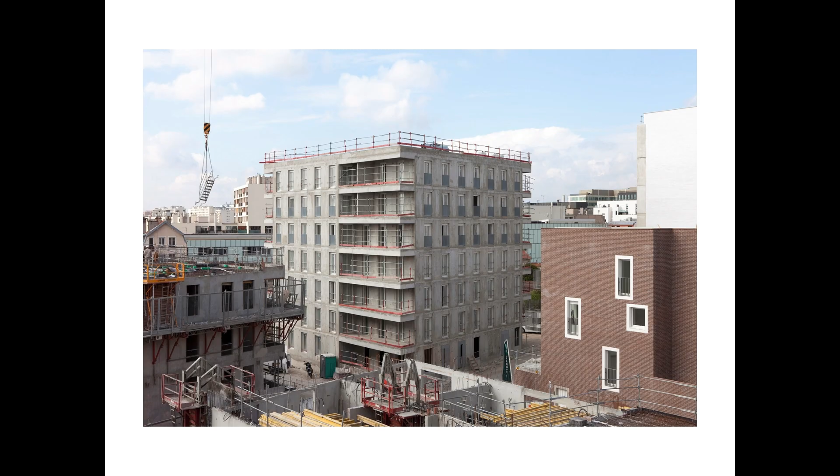This is the first building we did with the office—a competition, a commission we got in 2009, at a moment where sustainable architecture was kind of painting everything green. We did not feel very comfortable with this, and we wanted to provoke maybe the word, the context, the politics that were claiming to be sustainable while mainly doing buildings such as this one, all concrete.

So it was just a way for us to try to explain a little more what we did here. When we start talking about sustainable architecture, it was definitely not about painting a building green—we had to go deeper into architectural culture and the history of construction to really understand what sustainable architecture means.

This is a research project, so I'll start with the research, even if the building we built came before this exhibition. It was an exhibition hosted in Pavillon de l'Arsenal in 2018, and this exhibition addressed three major relations with construction.

The first was the territory, the resource itself—limestone, which I will talk about. The second was the ground, the relation with the ground: building is extraction, whatever you do—it's transforming the crust, the earth, into elements of architecture.

The third was this idea that when you find a natural object, architecture starts when the hand of men and women begins to appear on the natural fragment. That was more or less the way we wanted to start dealing with sustainable architecture through construction, through the ground, and with the notion of territory.

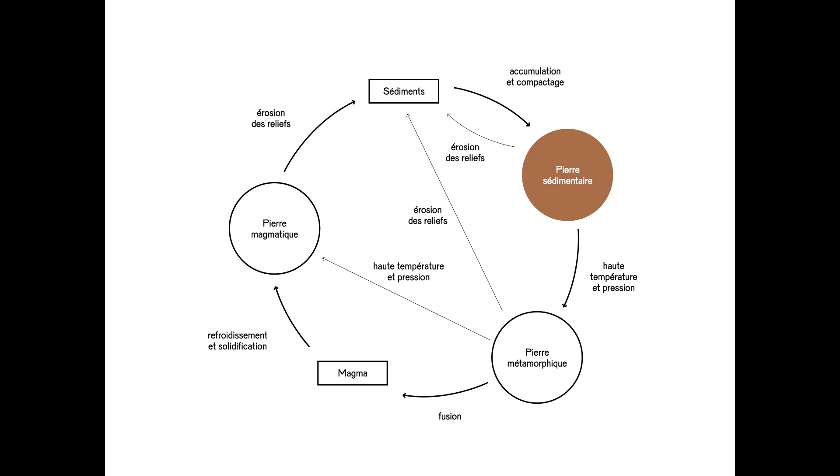What's interesting is the cycle of the process. Sediments become sedimentary rocks, and then with high levels of temperature and pressure, they become metamorphic stones. Then they get heated and become magmatic, then erosion, and sediments again, and sedimentary once more. It's very interesting to understand this is a very long cycle to get the sedimentary stone, which ages between 25 to more than 100 million years.

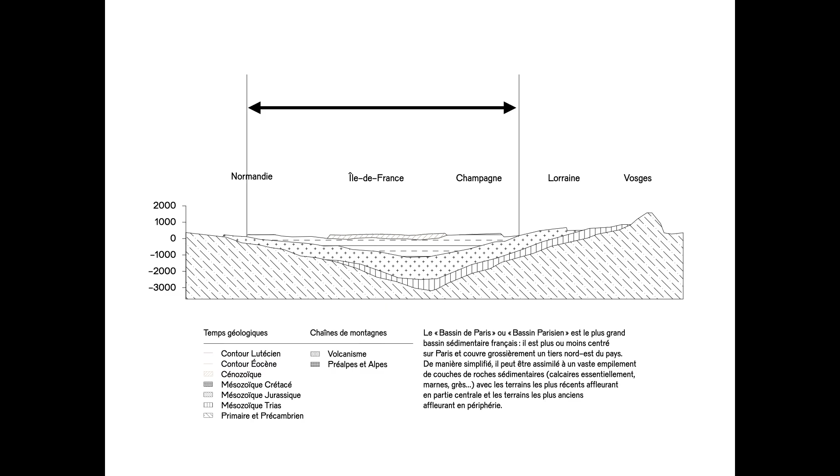So here you have Normandy, Île-de-France, Champagne, Lorraine, and then les Vosges. And this is the Parisian Basin, where you have all the sedimentation layers that have been layering on top of each other, creating this map.

What you see here in the lighter color is the Eocene era, and then you have the Lutetian, which is the most accessible layer of stone that you can get to build and extract construction stone from.

And then we selected 9 quarries that you can see here, 9 operational quarries. That was part of the exhibition to demonstrate the availability of the Parisian Basin to deliver a certain amount of stones to build and be part of the actual construction.

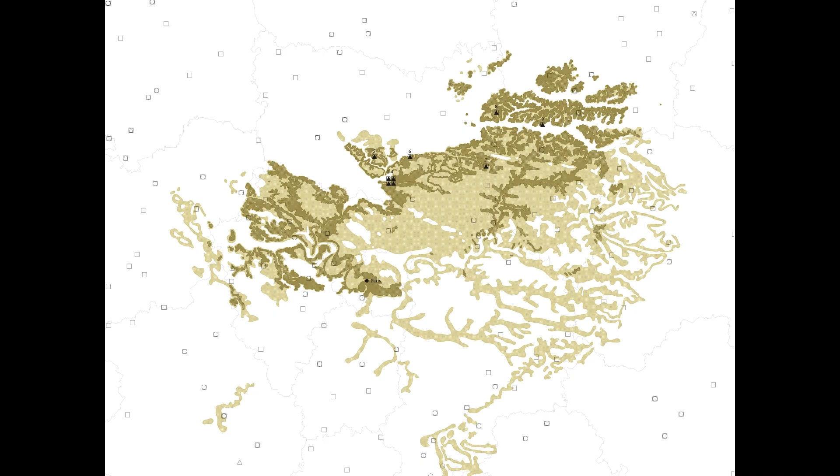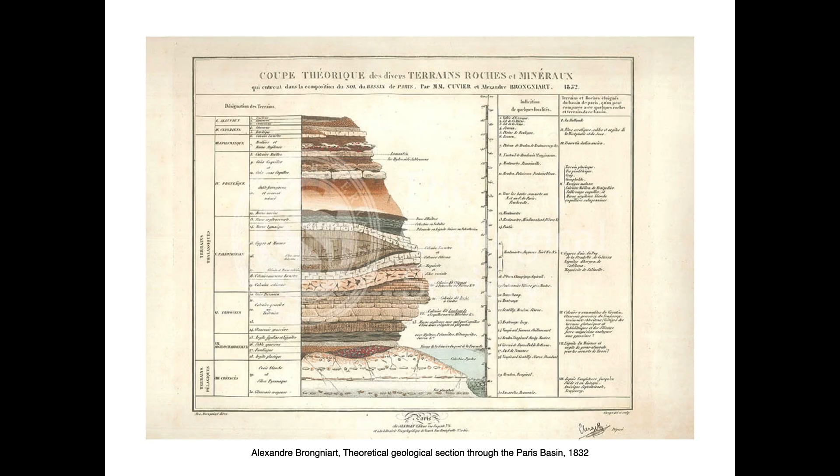So we were very interested in being scientific, very rational. We used old drawings from geologists, such as Brongniart, a very famous one. And then we started to describe each ground of each quarry and to be very precise about the types of stones included in each ground of each of these 9 quarries.

I won't go through all the quarries, but I will just show one. This is one quarry, for instance: Carrière de Saint-Maximin, which is a very famous quarry. The Pierre de Saint-Maximin stone is one of the most important stones from the Haussmann period in the 19th century.

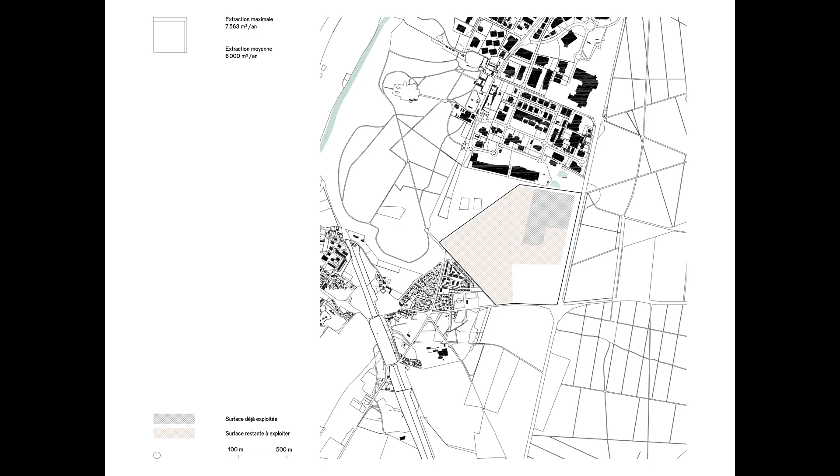Here in gray, you can see what has been extracted, and in brown, what could still be extracted. So for each quarry, we described the very precise amount of potential resource to continue building Paris and the rest of the territory with these natural stones, with natural material.

For each case, we described different layers. The first layer is what we call the découvert, which is the earth you have on top of the first layers of stone. Then you have different kinds of stone: roche franche, roche ferme fine, roche demi fine, etc., which are the different types of sedimentation layers. In each of these beds, you have different types of stone resistant to compression.

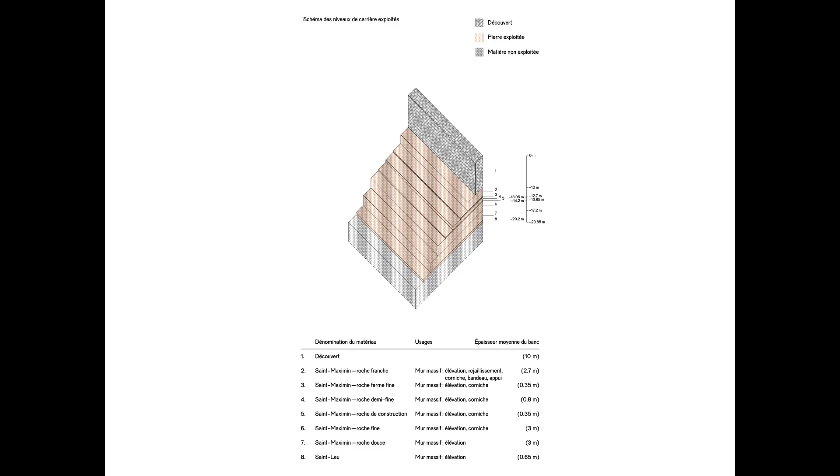You have a whole panoply of qualities of resistance to compression, of types of stone in each quarry. Another one, the biggest one around Paris, is Carrière de Noyon.

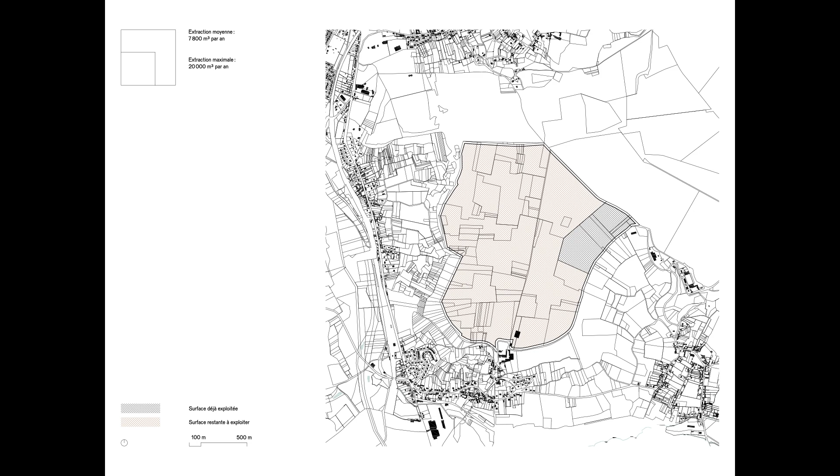This quarry is very big, so you can see again in gray. But if the first one was an uncovered quarry, this one is an underground quarry.

So here you can see the earth, and the way it is extracted: the stone is evacuated from this kind of tunnel that you can see. Here, a little less types of stone, but a very, very big quarry in front.

So we displayed all the types of stone, each as small blocks. They were all very specific, classified from here, the hardest one, to the softest one. So we have different types of resistance.

The first one can handle a type of resistance which is more or less even better than concrete, from like 75 to 80 megapascal. And this one over here is softer, between 6 to 7 megapascal. So different types, different colors, different shapes, different aspects, just to demonstrate the richness and elegance of the Parisian soil.

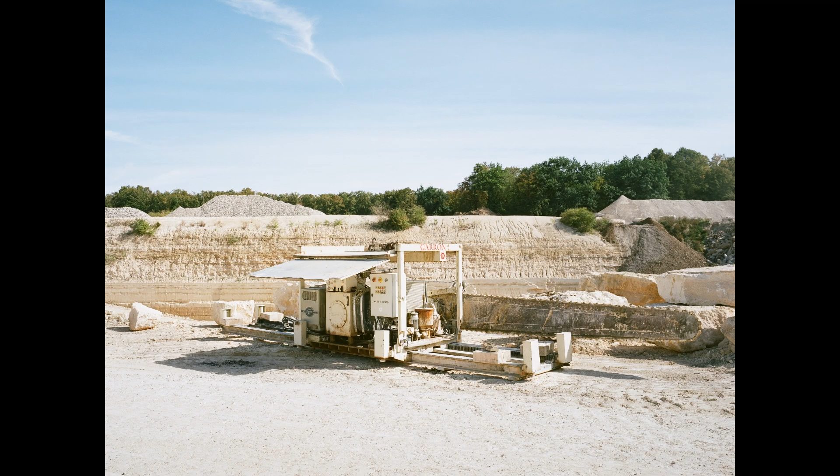And beyond this, we started—this was also happening at the end of the construction of our building, Oberkampf. So the conclusions we were trying to reach in this exhibition, the questions we were raising, were totally connected to the building we were doing.

First is this act of sawing, of cutting the ground with this one tool that has been used for years. The energy has changed, but it's the same principle—a very big knife, une tronçonneuse, which we call haveuse, naveuse. And when you extract, transform, and put stone into buildings, it's the exact same way.

We were very happy understanding this kind of immediacy in the way you deal with this natural element that becomes an architectural element. A natural piece of ground becomes a very sophisticated and cultural element of architecture.

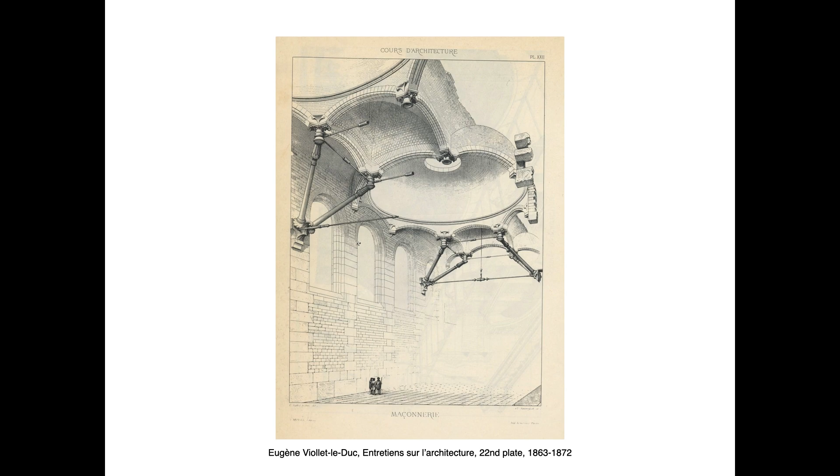Last, maybe a conclusion of this exhibition was our interest in hybrid architecture. There were debates we had with colleagues also interested in stone construction, saying that when you use stone, you should not use anything else but stone. We did not feel very comfortable with this, and we thought maybe one way to give power to the stone industry is to make it...

...negotiate with the other industry rather than saying, okay, I'm the best, I have the solution, and concrete is bad.

We were very interested in this kind of approach towards architecture and the mix of materials. This building was delivered about six months to a year before this exhibition.

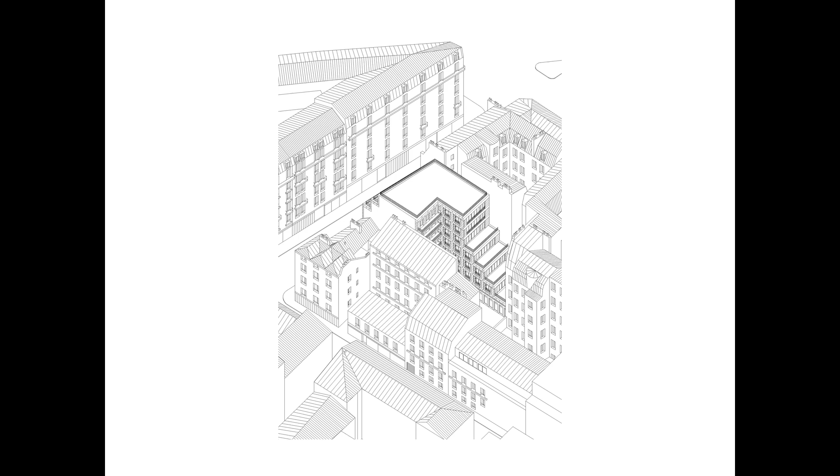Here you can see the response on the master plan. You can see the courtyard, which is a response to the existing courtyard at the center of the plot. You can guess the shapes of the windows, and here the adjunctions of buildings, concrete elements that we can talk about after.

The plan has three apartments per floor. One is traversant, a crossing apartment. Here you can see the setbacks—each time you have a setback, you lose one room to raise the top, and then there's a studio here. Also the structure was another way to consider this moment of the late 19th century, where housing in Haussmannian style also considered steel in construction.

You can recognize steel columns here in the middle of the plan, which organize and structure the layer of the plan. It orders the position of the shafts, the bathrooms, and everything here and there.

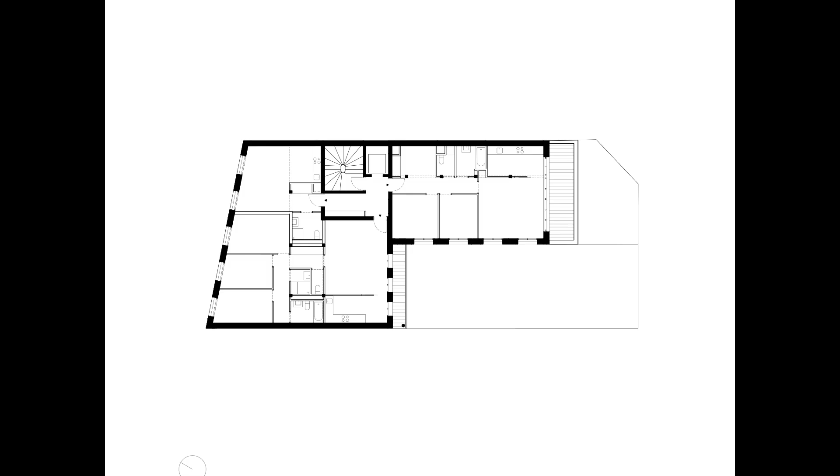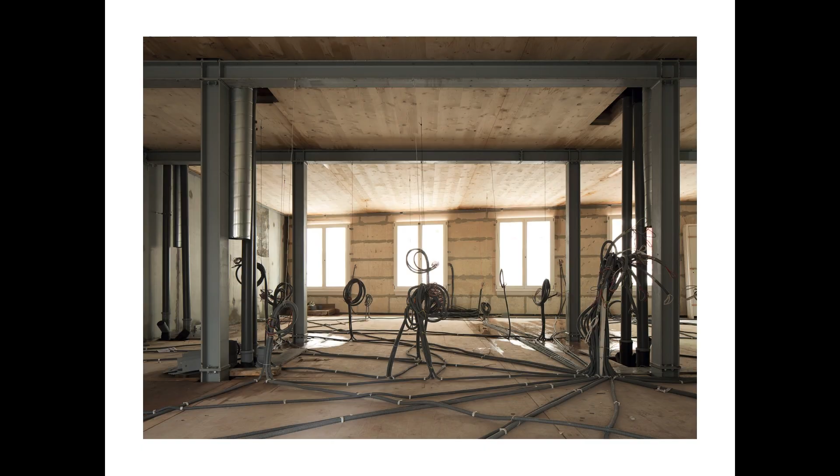That's a construction site picture: wooden floor, load-bearing stones, and steel structure.

It was very directly connected to Haussmannian architecture, trying to demonstrate that sustainable architecture can simply be connected to parts of history which were already dealing with the same topics, without knowing it of course. But that was the most interesting part to us.

And then you can see the wooden structure used because of the wood itself, but also because of the weight of this plinth, of these floors, which were very light. That lightness brings the possibility to use load-bearing stones.

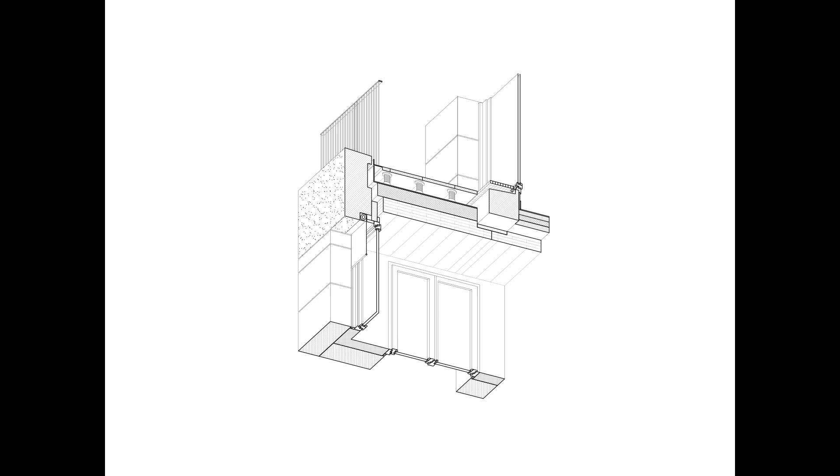Without really claiming it. So here you can see the setbacks again, and the window that we can talk about now. The window is an assemblage of single stones like this, and then there's this small shape we gave to the lintel. If I go back to the quarry, I'll talk about this lintel afterwards.

This is where the stones come from. It's a pity they don't come from around Paris, and this is why we made the exhibition—because the building was built before the exhibition, so at the end we realized we should have used Parisian stone to reduce the distance between the building and the resource. But it was our first building, and the next one hopefully will pursue this ambition.

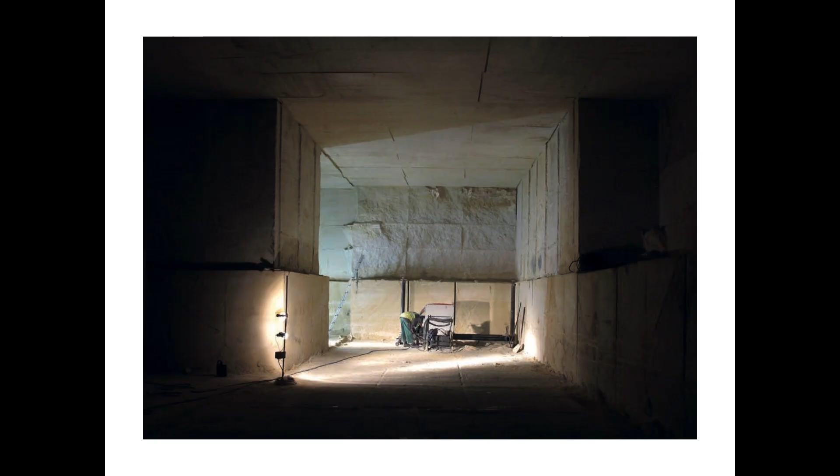So we get inside the quarry, and it's very interesting to recognize the very specific on-earth position of the material you will use. It's very enthusiastic. You can see our stones being extracted here, being laid out, so you can choose the stone you want, the stones you don't want.

It's like being on a market, actually, choosing the different vegetables you want to get. So you talk to the different people in charge, and you say, okay, there is too much iron marks on this one, and this one is maybe too white, et cetera. You can kind of select the ingredients of the building.

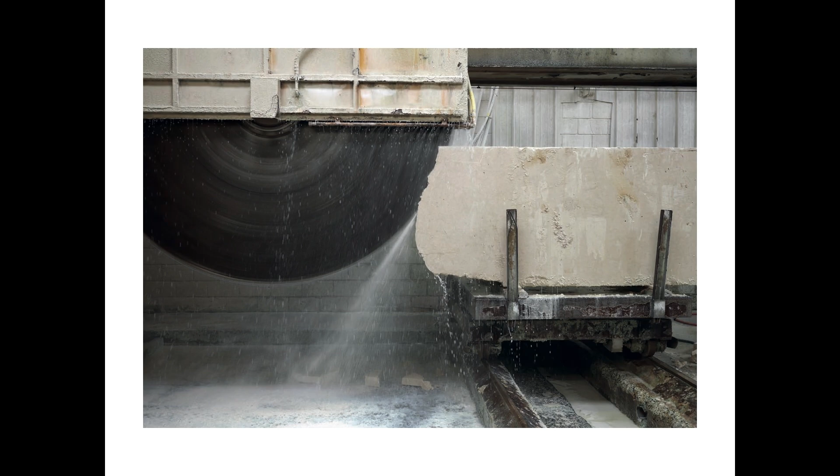And then there is this moment of the cut. This is where the economy comes again in the discussion, because that's the only thing that you do to this big fragment of soil. So when you start cutting this very large piece of ground, of lime ground, you understand that this is the only tool you have in the economy of a social market. It's the only tool you have to give and to bring some modénature and some language, something that will be relevant to the shape of the building.

So this cut, the angle of this cut, is the only thing that we can at this moment afford, even if the budget was high, let's be honest. But in the industry, you cannot do much more than just giving an angle to a saw.

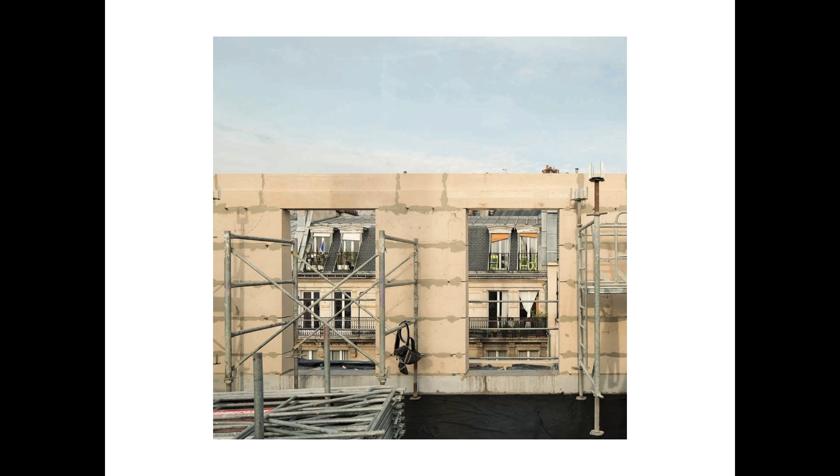And then what you can see again inside, that's the construction. You can see the different layers of stone. Very huge reference, I apologize, but it's a very beautiful building that was also trying to deal with what's load-bearing. Everything is load-bearing, more or less, in this building. They were keen on showing the distinction, or maybe the ambiguity, of the wall between the skeleton.

And when you start building with stones, this is something you very easily face. Am I a skeleton? Am I a column? Am I a wall? And this is, in the Rucellai building, something that was very appealing to us.

And we were following this path, trying to say, okay, maybe in this consideration, bringing this little angle to the lintel, then we can start showing the presence of a column, even if these stones belong either to the window, to the columns, and to the wall. We were starting just with one small cut, to participate in this debate of ambiguity between: when I'm building, am I doing a stone, am I doing a column, or am I doing a wall?

And then from this building, we did this other one, which is the construction will start here on November 1st. So it's another building, but this time a little bigger than the first one, very same principle, so hybrid, load-bearing walls, and a concrete base.

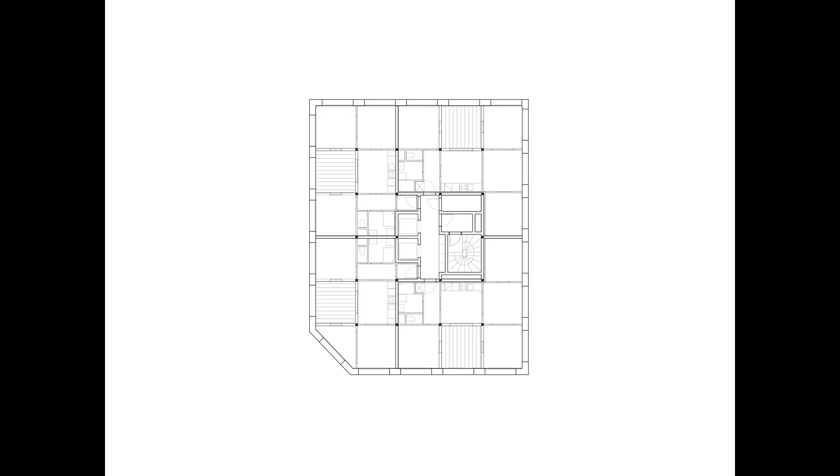Hybrid again, just like the previous building, so you can see the concrete core, which is used less and less as you start reaching the top. Wood floors, load-bearing walls again. And this is how it works, more or less. So we have like one - this is the floor on the top, this is the register below.

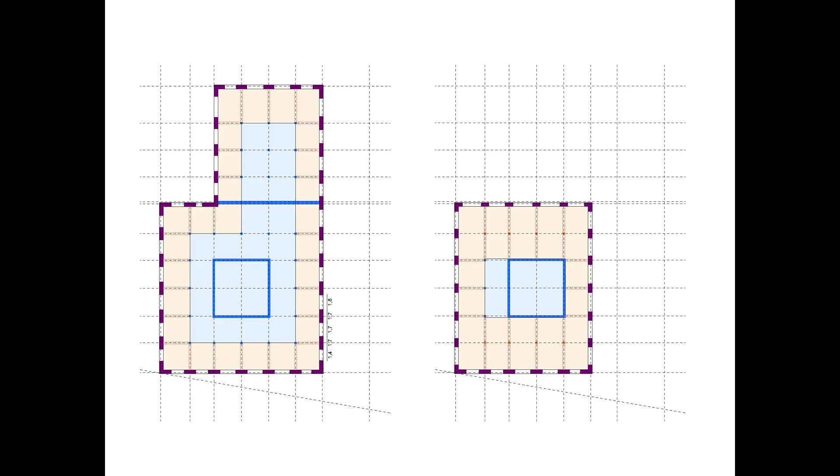And we have to be very precise also in the structural drawings when you start, having the loads of the plinths getting in the very strict middle of the trumeaux, of the pieces of stones here along the building, in order to maintain a very

let's say, attached relation between the plinths and the load-bearing facades. That's the construction principle. So we have one layer, a strip of wood around the building, necessary because of the weight of the floors. And then inside you have concrete, and you have this column supporting the end of the concrete, so that the concrete doesn't touch the facade, in order to maintain the load-bearingness of the facade. And then you have insulation here inside the building.

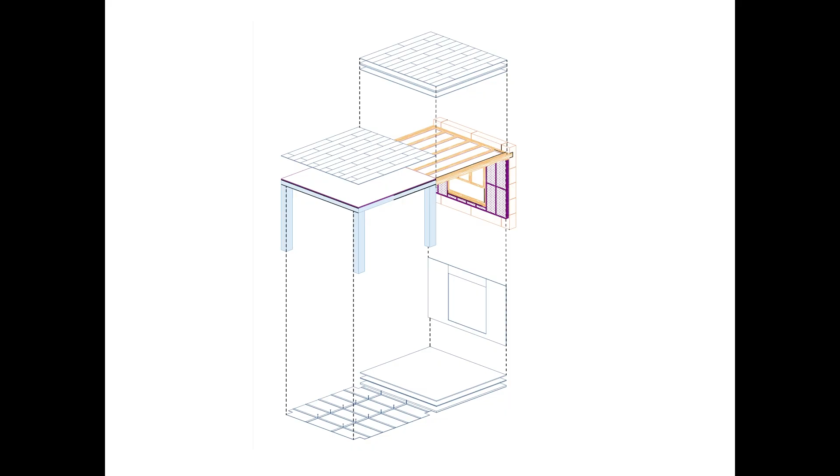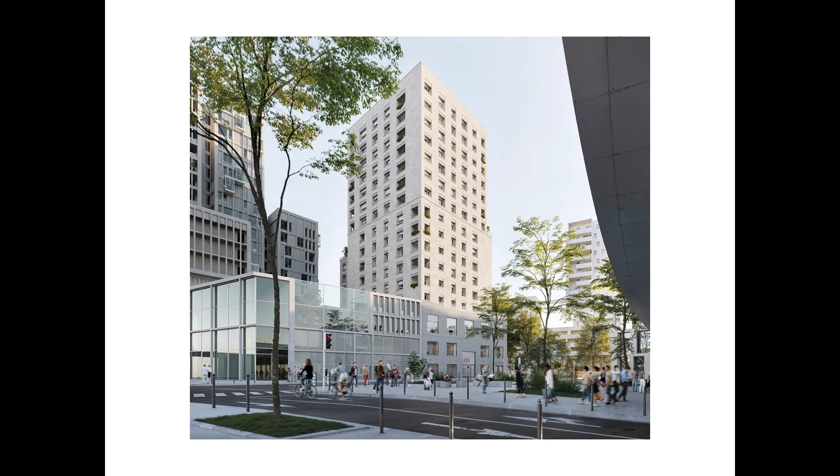More recently, we had to add these very large pieces of stone in order to resist the horizontal efforts. Before, we used to have rooms at the angles, but to maintain the load-bearing facades, we had to add recently, this summer, these pieces of stone. But then it creates a kind of ambiguity between the dimension of the windows, etc. I think the scale is a little reduced.

Another story is the one about objet trouvé. Objet trouvé is to us another way to address this matter of sustainable architecture. I will borrow this word objet trouvé, and quickly present one small exhibition we did at Cité de l'Architecture, which was followed by a sculpture, and then an exhibition. I'll also shortly talk about a class I've been giving students for 5 years, where I've been interested in objet trouvé as a new relation we can have with surrounding ordinary objects, topics also raised by artists at the beginning of the 20th century, such as Apollinaire, who we talked about at the beginning of the lecture.

Very shortly, we were invited by Cité de l'Architecture to invent something with this very weird shape, which is a ramp, supposed to be used for skateboards. We found ourselves a little lost, we have to say, but we consider this an objet trouvé, something we have to deal with, just like if the mission was to transform an existing building.

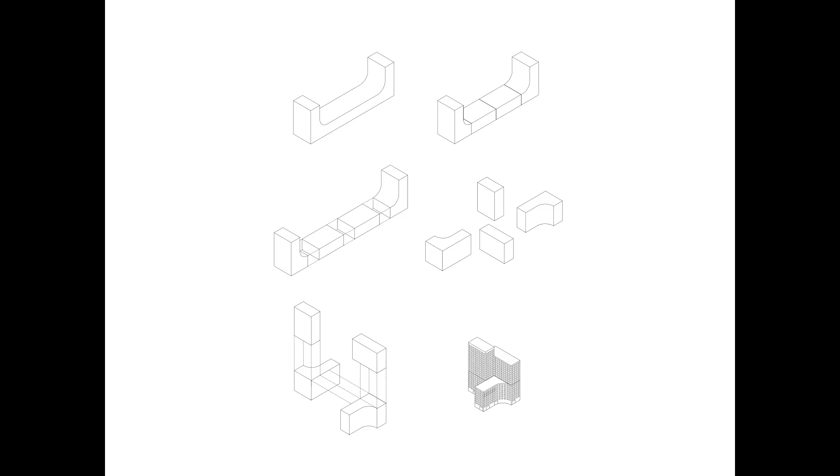And then we moved the pieces around in order to lose the symbolic of the ramp, of the skateboard ramp, to create a very simple architectural model. So with the act of cutting, an economical act, we found another language for these pieces of wood that we found on site.

So at the end, it was just a model of a building in which you can still recognize the previous shape, as if it was a new destiny for the same object, as if things were having different lives, and the object had one life, and then another one, and so on. It was very interesting.

It was the first relation with the purpose of reuse, of recycling, of what it means to use something and to recognize the thing you manipulate in the next process. Here you can see the circular shape and recognize the existing form, and people who know this weird shape recognize it, like a déjà vu moment. Even if life goes on, it's always interesting to maintain the autonomy and identity of the ordinary object you manipulate in construction.

And then we invited several young offices interested in the same purpose, and asked them to do the same thing with one object they should select from their ordinary life, to transform it and give it another scale, another purpose, just to express the power, the strength of the idea of the objet trouvé, as if the most boring object could become the most interesting architectural element.

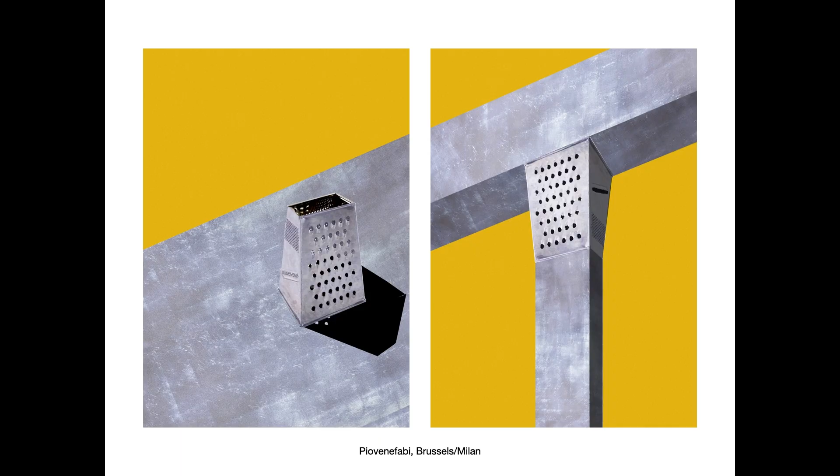For instance, Piovenefabi in Brussels, they're Italian of course, used a Parmigiano grater, and put it and turned it over in a very simple gesture. Again this economy, a language raising from the economy of the gesture, becomes an architectural element. It's fun, but it's very, very, very serious.

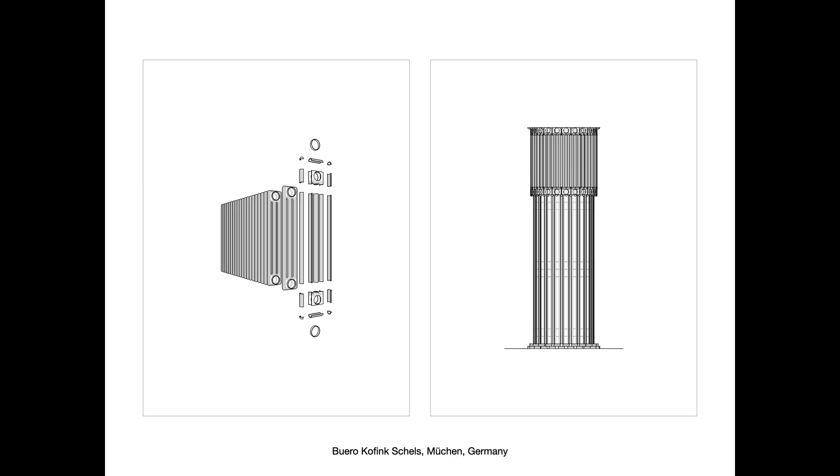While this is happening, it's also a way to be very observative and to look at things. The moment you want to transform something and keep, in an economical way, the qualities of the manipulated object, you start to look at it very closely, very precisely, again just like a scientist, an observer who is interested in things we do not usually look at.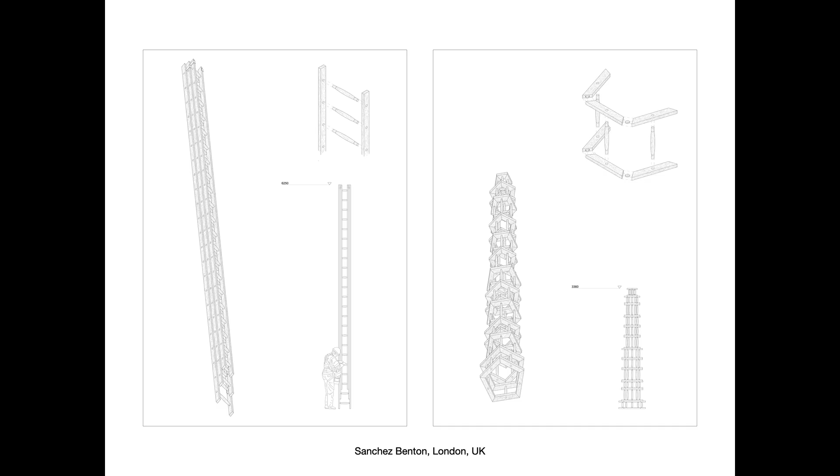So these are a few slides from the class I'm giving to the students, which is also the start of a thesis I will probably try to finalize within the next two years.

The title is 'The Liberation of the Object,' something I borrowed from a very beautiful book, from William Seitz. It was the first retrospective of this notion of assemblage, which may have given birth to the nicest artifact of the 20th century.

In this specific book he discusses many artists. There is this quote, which I translated myself, from Guillaume Apollinaire, which says: the real object, or its trompe-l'œil representation, is undoubtedly destined to play an increasingly important role. It forms the inner frame of the painting and defines its internal boundaries, just as the frame marks its outer limits.

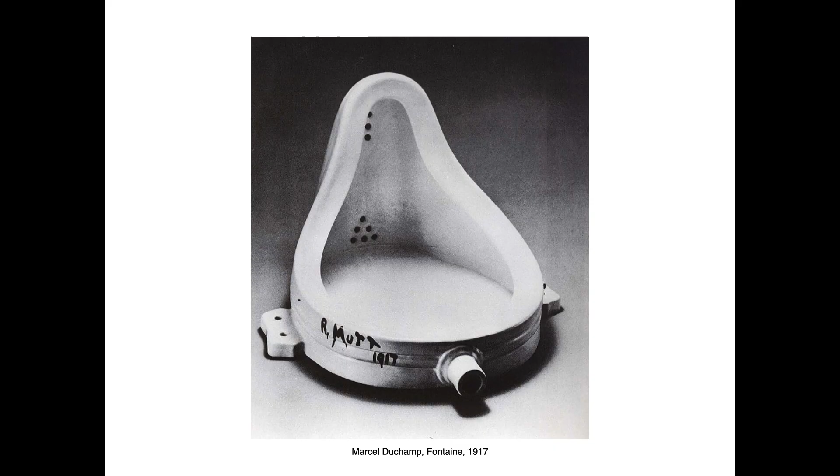And here they were giving birth to new relations with very simple things. Marcel Duchamp, of course — he turns something down and writes on it, but it's just a way to ask: what if everything was art? I won't go into the details.

Anne Lacaton and Jean-Philippe Vassal also give new relations with very simple objects. I'm trying to express that this relation we have with this kind of poverty, beautiful poverty, is totally related to the work done by this great artist at the beginning of the century.

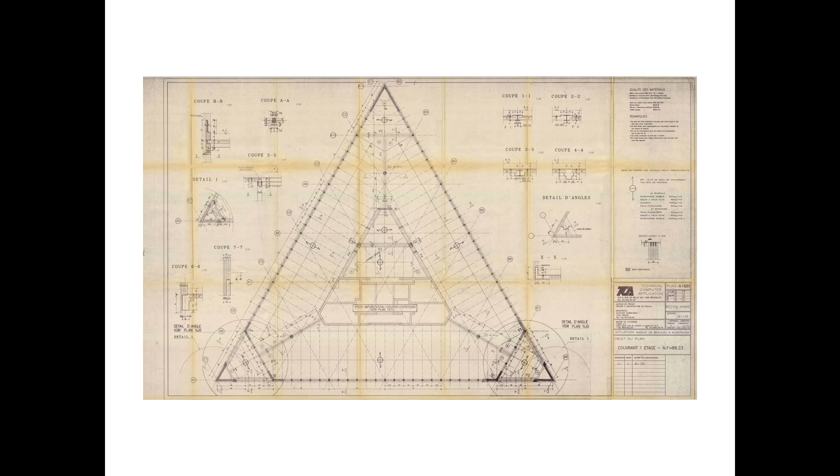And we cannot get rid of the facade because that's the purpose of it. And even if the developer would really wish to get rid of this, the city of Brussels is claiming that we should keep it, and we of course agree with it. Next, please.

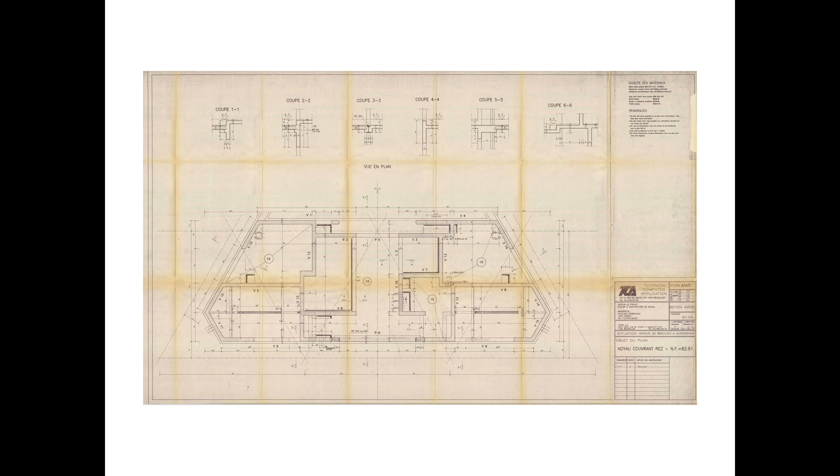Zoom into the core so you can see the different elements I was describing. So these plans are things that you get at the very beginning of the competition. You describe it and you talk with engineers and try to find a way to make housing work into these four buildings, even if I'll be talking about three triangles only.

Next. And what's great when you start to use existing shapes and existing objects is the shapes and forms you can provide, which is something you would never achieve without an existing structure. So we're very interested in this common weird shape spaces that are going inside the building. I won't talk about the plan because they're not done yet, and it's not the purpose. But what we like is the things that you get and have to deal with, and the shapes it leads to without, one would say, your will.

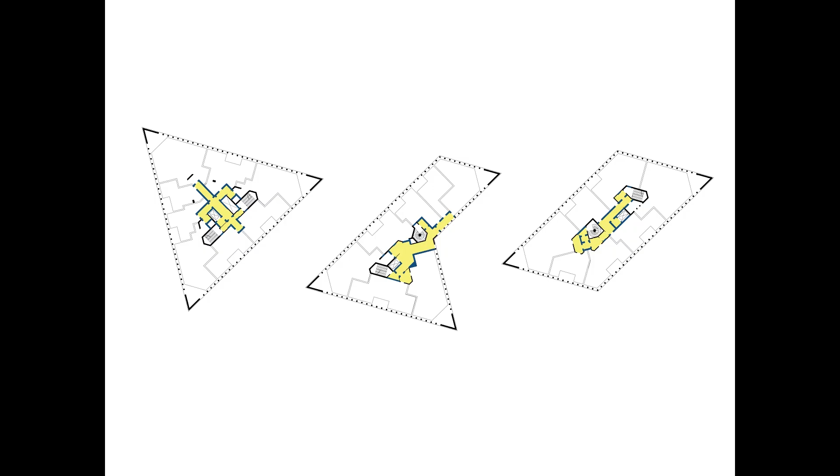And that's very interesting, just like the Marcel Duchamp object. You get it, and you just look at it, and it's just the way it goes. So you kind of follow the object in its new life. Next, sorry.

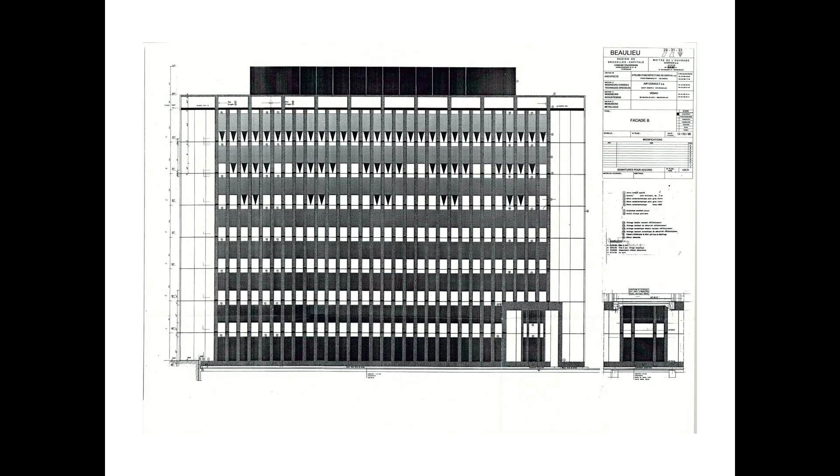That's the facade. Self-load-bearing facade, even if it gets just a little bit of the loads of the floors. And the whole debate here is about the keeping. I mean, do we keep the existing windows or not? We have, next,

1,887 windows. Okay, they were built in 1999. They were changed according to the previous building. It was built in between 1982 and 1984, for the buildings you had on the right side of the image, if you remember, and the triangles were there before. And so here, that's the existing windows.

They're a lot, very, very good shape. But the problem is they do not offer the technical, acoustic, and thermal conditions that the developer wants to offer comfort in the buildings. So this is totally incoherent with the current regulations. The windows, let's consider them more or less new. They're nice, but the regulation forces us to trash them, let's say. Next.

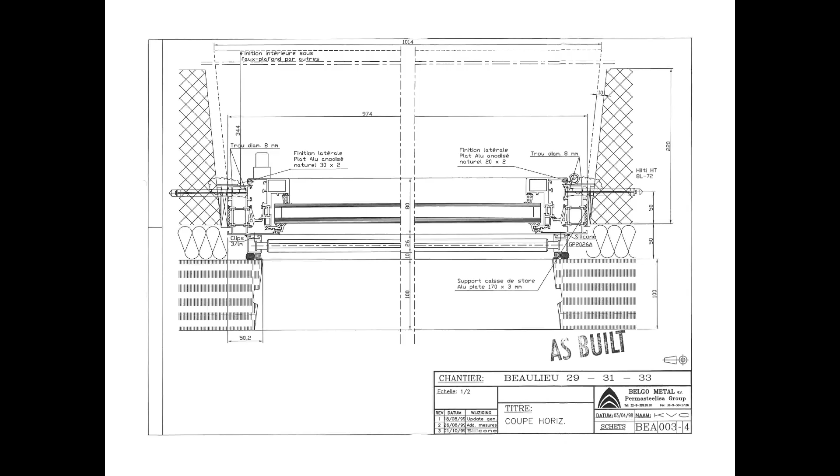So that's the description of the window. It's very well done, honestly. You have a blind outside here. It's aluminum windows, double glazed windows. So everything is totally dedicated to be kept, actually, totally okay and aware of being kept.

Next. If we talk about CO2, it's interesting to understand that each aluminium window is more or less 1.8 square meters per window, and each square meter has consumed, one would say, 70 kilograms of CO2. So total CO2 emission in the construction and shape of the window is like 235,000 kilograms, as you can read. Which is more or less like 260 times from London to New York by plane.

And we're trying to express this kind of argument to the developer. We're trying to say, okay, we should really make any efforts that are possible, and we're organizing meetings like tomorrow and yesterday and every day to say that we should reconsider this relation with this kind of existing object that should never, ever be trashed. So we are organizing a strategy where we say we have the existing facade, we have the existing windows, and we should really not get rid of these windows, that we should really, really keep them.

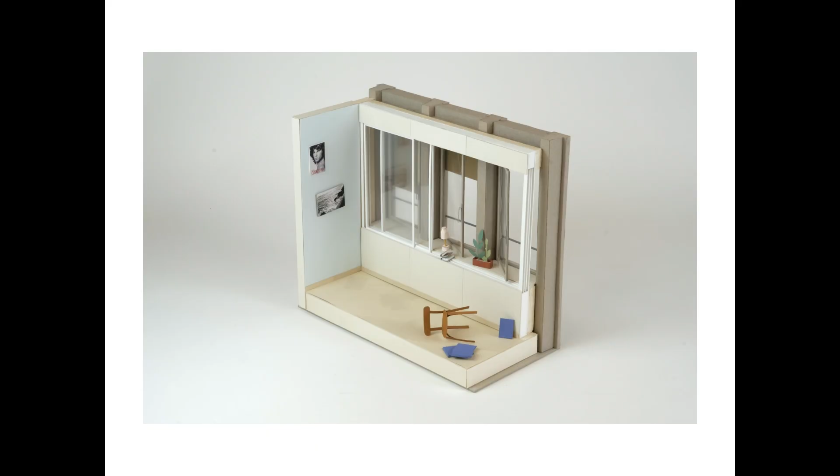And we try to argue and express the fact that what if we add one insulation layer inside the building, and we have another layer of windows, very simple windows. We're trying to demonstrate that the price of these windows, because of the existing ones, should be reduced first, and of course we will save the economy of the trash of the existing windows. And then we can also create this kind of new thickness inside the building to maintain the identity of the existing envelope, the existing structure and the existing windows, and to give another domestic scale to this insulated thickness, which is the section you can see here.

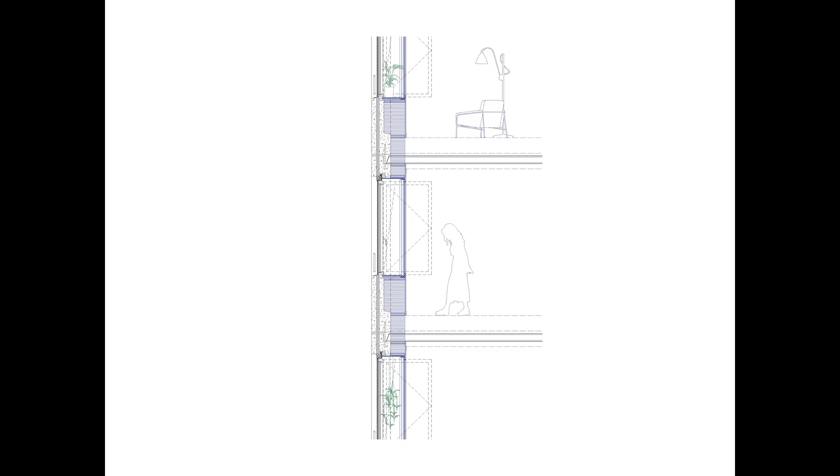So that's one strategy, and here I will talk about the hemp after. So that's hempcrete insulation filled in this thickness. And then you can see that there is one layer, one thickness of insulation, inhabited here with new uses, performant in order to maintain comfort inside the building.

So that's the other strategy. The first one is the relation we have with the cores, like I said. And second one is this, it works. No, previous, sorry. And then we inhabit this thickness. And this is kind of the start of the story of the Wallness I will talk about afterwards.

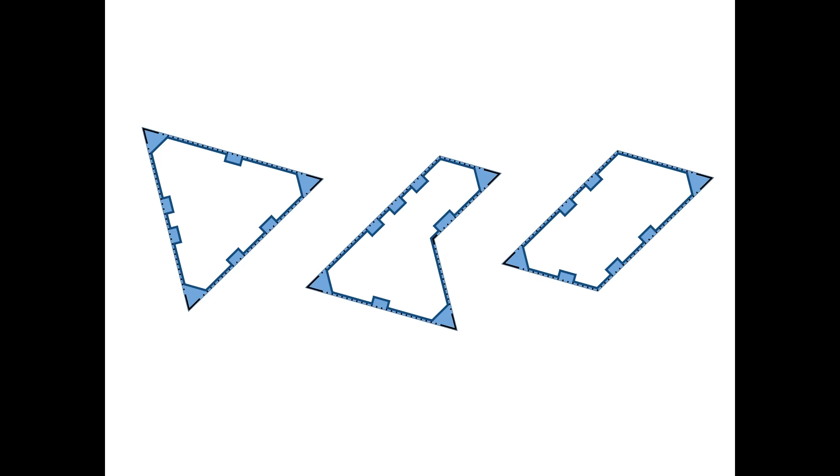It's the way that with this new layer of insulation, this new inhabited layer of insulation, either it's glass or it's outdoor space, but it's the very same blue lines that go all around the building that create these new things that you can enter yourself, or stuff or objects dedicated to the domestic scales.

And that's the third story, the story of... I don't have the clock anymore, so you just tell me when I'm too long. The hemp. So this is the first house we did with my partner and the rest of the team. It's kind of contemporary with the concrete building I was showing at the beginning of the lecture. It's a small house in a very, very beautiful landscape in Normandy.

And it was a commission, so we were very lucky. A guy came and we had never done anything before, and he said, okay, I want a house. I have this very beautiful plot in the middle of Normandy. And the client was very good at describing the climate of his landscape.

And we decided that we should team up with engineers. I did not mention them at the beginning of the lecture because this was the first meeting we had with them: Laurent and Grégoire Mouly, two engineers, two brothers. One is talking about structure mostly, and the other one about insulation, envelope and thermal issues. We understood that the client, in the way he was describing the climate, the seasons, the relation he had with the environment, made the two engineers very curious about this relation with climate, and they brought into the topic this material we discovered at this time, which was the hemp.

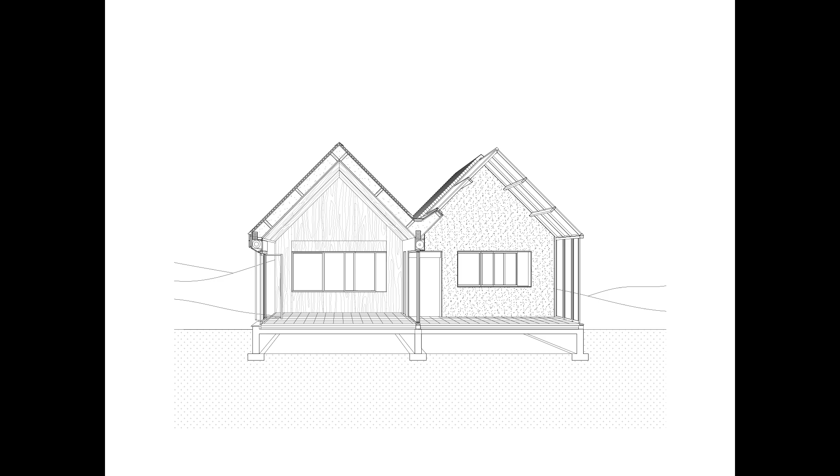Here you have one interior space. Here you have one, let's say, jardin d'hiver, loggia, outdoor space.

The skeleton is all made out of wood, following the same constructive principles of most houses built in the territory of Normandy, just building with wood, detached from the ground to maintain humidity away from the wood elements.

The subject was just like this: how can we fill in the blank, and consider this envelope as something, the insulation as a component of the wall itself, before being an element of the wall. It was just like torchis, this thing that you fill in, that you put in Normandy and many rural territories, inside the skeleton. It was the very same principle, but with a material that was way more dedicated and performant with the surrounding environment.

So that's the plan of the house. That's the garage, the entrance is here. You enter the house through this kind of protected outdoor space. It's a living house, not a secondary house, not a holiday house. It's a house for a family that lives here the whole year, so it's not the very same thing with the relation to exterior, to environment. We protected all the outdoor spaces.

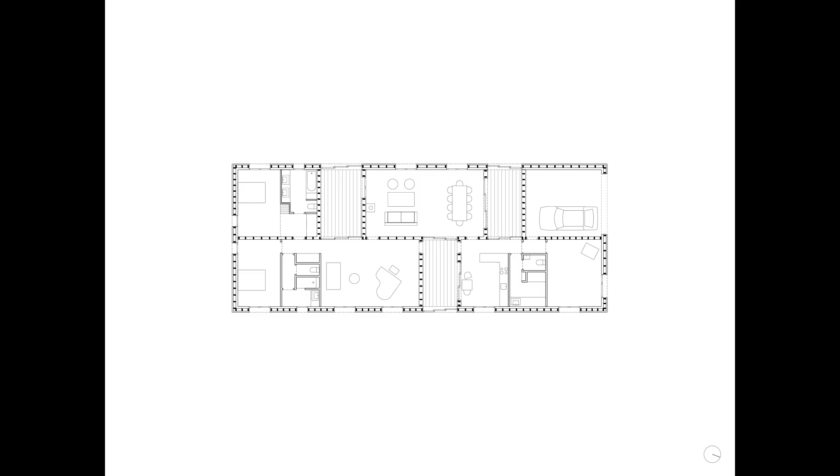And then we separated this living room, secondary living room, which became at the end 2 rooms: the room for the parents, the kitchen. And the living room here was having connection with these 3 outdoor spaces and with the environment. So we were very interested, in this kind of double longère, in the new relation of spaces beside the tradition, which could have all the different rooms, the relations between the rooms.

But more important was the way we started to draw the envelope. This is all insulation. Very recently, while finalizing the research Wallness, we understood that at this moment of the practice, we decided we should not represent what's in between the different parts of the structure with black poché, as if the matter was not important, and that we should just represent fullness in between the windows. We realized recently again that maybe the way we were starting to represent the solidity of the building was another manner to reconsider relation through the insulation between the environment.

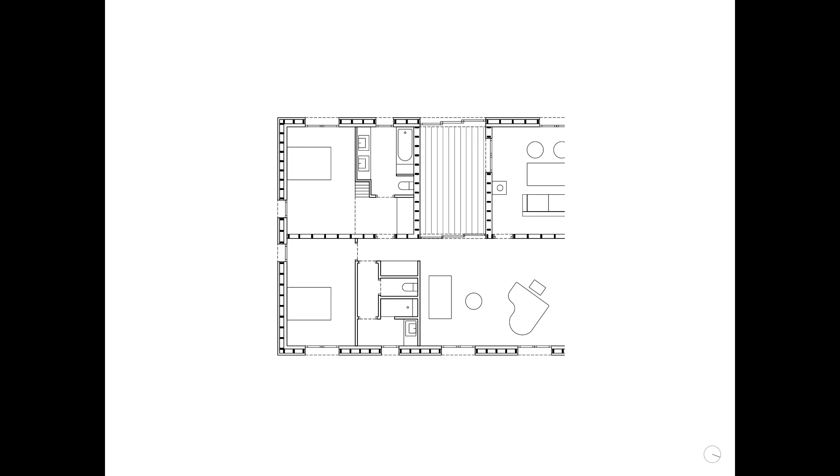So it was not only visual through the window, but because of the characteristic of the hemp—I'll talk about that now—we could provide some new relations with the environment and the exterior. The composition of the hemp, the way the air and water goes into it, the reactions, the dynamics happening inside the hemp envelope, is giving some new interaction, even somehow new transparencies, between inside and outside.

So, very interested in this facade, which was plain, blind, but still giving some very interesting relation with the exterior, in which the space you can feel the season, when it's dry, when it's wet, when it's summer, when it's winter. And the client keeps telling us—last time we saw him was 2 years ago—that he was very, very interested in the interaction, through the hemp, with the different seasons.

And then the view of the building, of the house, which has gotten black, but it's at the end of the construction, 10 years ago, more than 10 years ago now. And this building, almost 10 years later, gave birth to another project, a small 15-apartment building, Rue Marx Dormoy. Same principle, same use, same material, so hemp.

When you build in Paris, you rather build streets, just like Oberkampf. It's a very strict, very monumental public space, and whatever you do, you have to participate in the landscape of the street. In Oberkampf, it's a very bourgeois, Haussmannian, and Faubourian street. Here it's only Faubourg, so everything is very eclectic, very banal buildings, and the street is way wider than Rue Oberkampf, which was narrower.

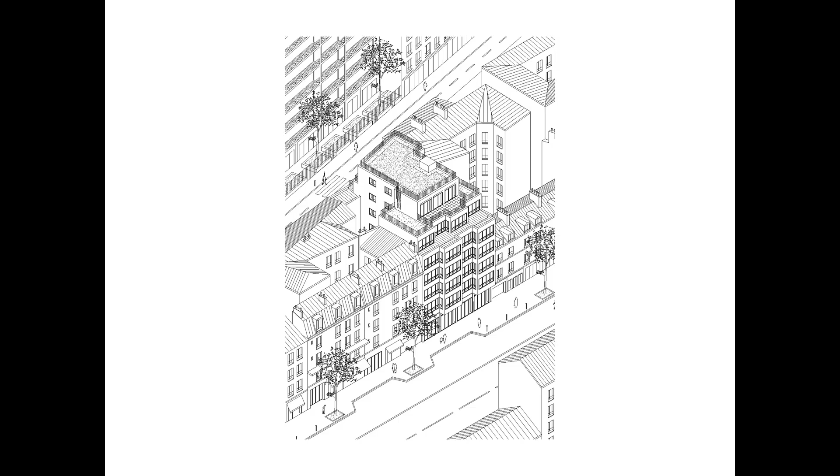So that's the axonometric view. You can see it's a crossing plot, and here the street with this alignment that we did not respect. So we kind of investigate this idea that starts to happen.

Investigate this possibility of building above the street, the public space. This is something that happened at the end of the 19th century, in the Haussmannian moment, that's the Haussmannian style, and then debates started to express the idea of the picturesque. Maybe our streets, our boulevards, this first Haussmannian period was becoming too boring, and we should give some diversity and eclecticism and picturesqueness to the city landscape.

This is when, in 1884, they decided on this decree allowing people to build and set back and build over the public space. That tradition gave the possibility to offer different shapes to the building, as long as you limit the exterior at 50% of the whole facade aligned on the street.

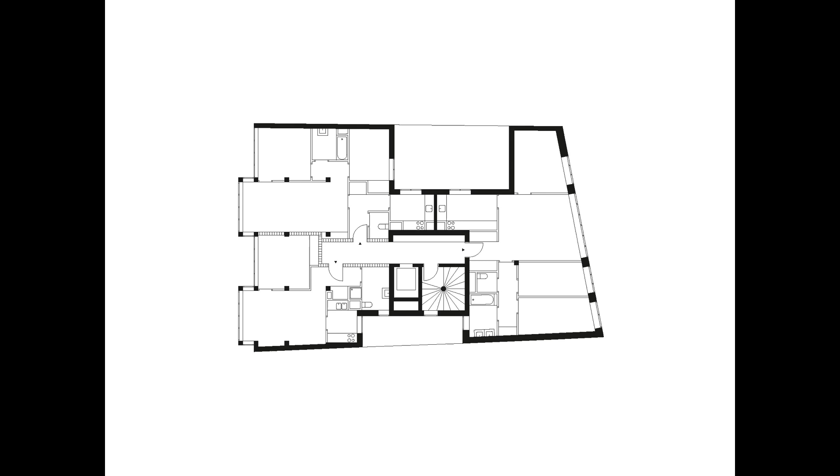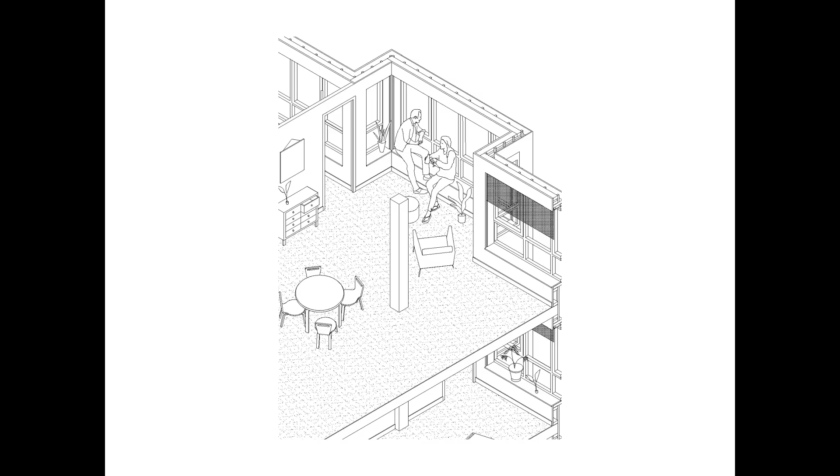So that's the plan, a concrete skeleton and a hemp insulation. This thick facade, this kind of double thickness, the thickness of the wall and the thickness of the facade, is giving this kind of picturesque relation between the different spaces, providing new comforts, new uses, new spaces.

Another image where you can see the opening and the relation you have with the street. With these two windows, you can see all the way north, all the way south to Métro La Chapelle or Porte de la Chapelle on the right side. And then you can sit and put objects and everything.

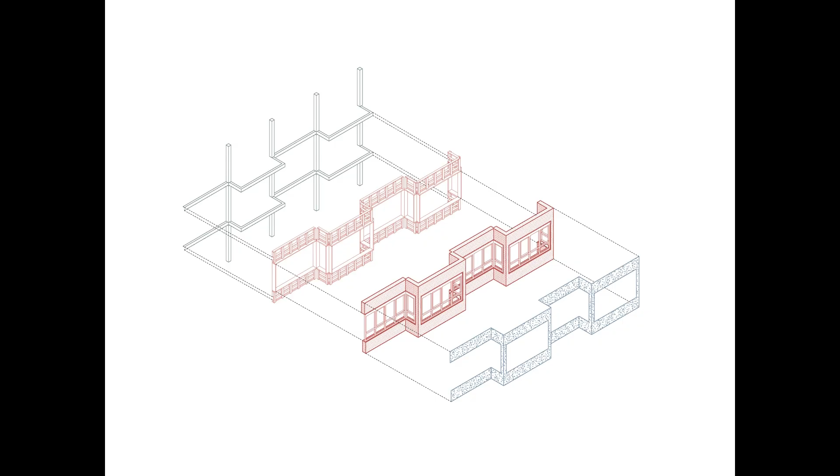That's the construction principle. That's the concrete skeleton you can see here, and the wooden secondary structure that we fill in with hemp, on which we apply a stucco, a gray, bluish, weird color that I will describe on top of it, as a last layer, an overall surface to maintain this idea of continuity of banal building that exists all around in the neighborhood.

That's the concrete skeleton. We're very happy to refer ourselves to the Dom-Ino skeleton as a very simple, very direct way of using concrete. So it's plinth, floors, and columns.

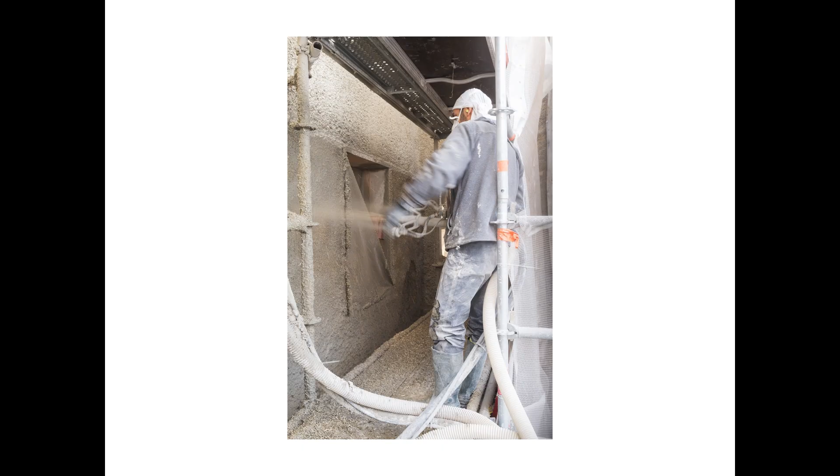Then you have this mix of hemp, lime, and water projected from the outside inside the skeleton that you can recognize here with the kind of ghosts existing, on which you will apply this mixture. That's the strategy of the envelope: skeleton around which we put the envelope.

And that's the end. If you zoom in, you can understand this, these different topics I was trying to express.

This is when, at this moment, we started to apply the same principle from practice to research. We did this building with stone, then we started the desire of an exhibition, a research about the stone, and it's the exact same thing here. We did this house, we did this building, there is also hemp in the stone building, and at the finalization of this building, we realized that something was happening in these two projects, this kind of wallness, a situation of insulation being a wall which is not a load-bearing wall anymore, like it used to be. But it was a wall with a new mission, dedicated to thermal comfort, to economy of energy, to consumption of energy, to maintain a certain comfort inside the building.

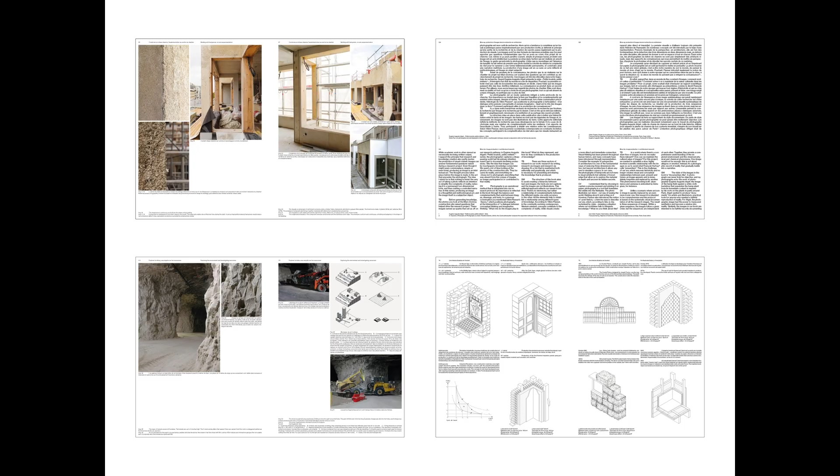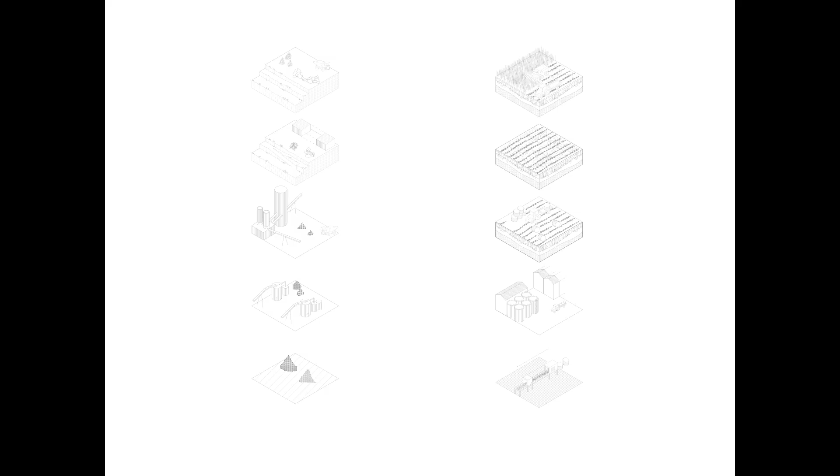So that's the pages of the book, organized in two columns - that's the resource. On the left part you have the lime, here you have the hemp. So we described the growth of the hemp, and also the way the lime, the sedimentary rocks, were extracted to become lime.

It's kind of a bad plant, something that grows everywhere. But at the very beginning, the stem of the hemp was dedicated to incineration, since the beginning or middle of the 70s. It did not find any uses, any purpose.

So we start to have this very close look, as documentation. You document the thing that you look at, you observe. Jaime Meloni was doing this, following the way Eugène Atget, for instance, was looking at the plant, bad seeds, bad plants all over Paris in the changes of the metropolis between the 19th and 20th century. Same discourse, same principles, same systems of observation.

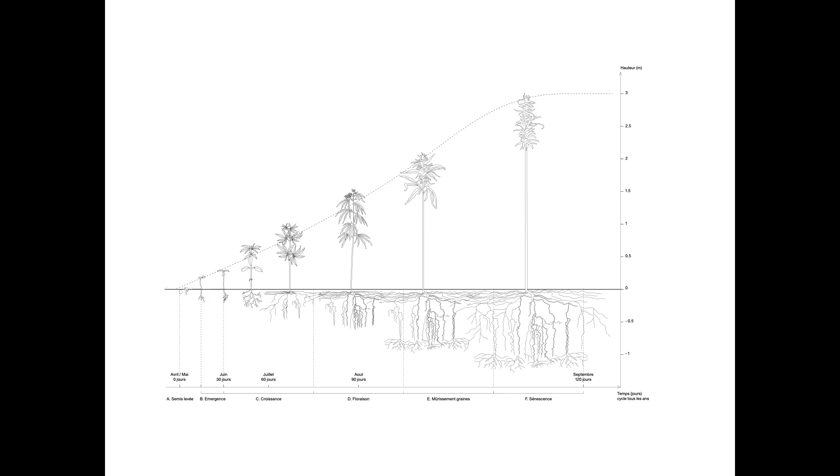The growth, of course, when it grows, it gets carbon, like any vegetal. That's the plant. And then that's the root. That's the stem here. So we zoom in more and more. And then that's the description.

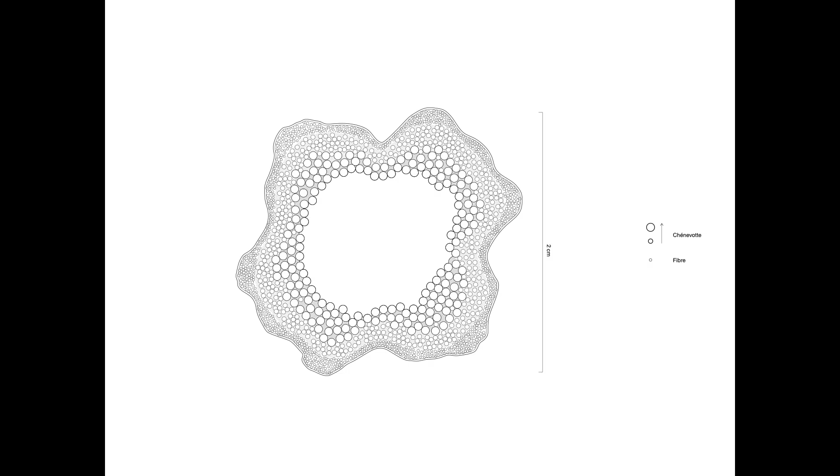That's the thing that we will extract from, detach, extract from the fibers, and that will be used to produce this mix of hemp and lime.

So we go further into the stem. That's one moment. That's the fiber that's separated from the chenevotte. So we go into, and that's the fiber again. I missed one picture, well that's okay - of the chenevotte, but then it's packs of chenevotte brought into the site.

So from one plant, one resource, one product of the soil - a product of the soil, while the stone is a fragment of the soil. So two different relations with the crust, with earth. And here you get the pack.

And then back to the ground with production of the lime. So you enter the quarry. I will go fast. That's the sedimentary rocks, a different way, because very soft, different ways of extraction than the stones we were talking about previously.

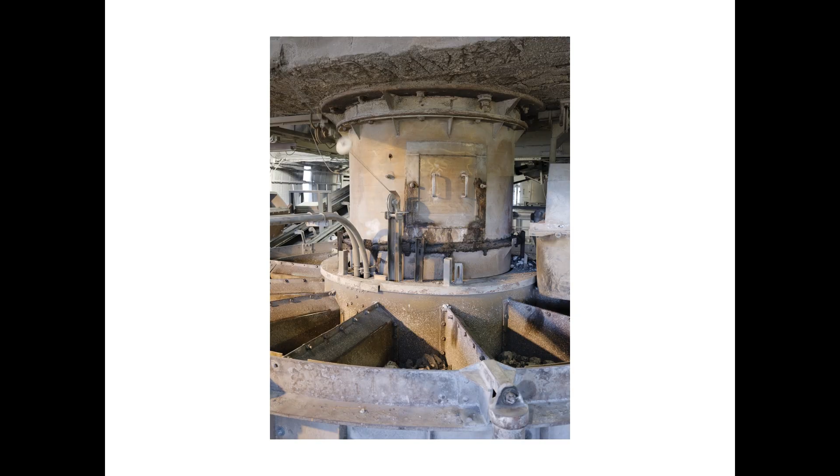And then you enter this Saint-Astier, very famous lime industry with the ovens. You heat everything. That's something you have to be very aware of - that you heat, so you consume energy in the production of the lime. This is why some people say that it's not the best insulation, but it has other very great qualities.

And the packs, just like the hemp, just like the chenevotte, other bags of lime brought into the site, to produce this image we were looking at - the projection with a bit of water, so hydraulic lime mixed with chenevotte gives this kind of continuity, this kind of very soft self-load-bearing walls, but not load-bearing walls.

So it's kind of ambiguous, because it's not like a wall, it cannot get the loads, but still it insulates. So what if, that was the question, what if the purpose of the wall nowadays was rather to insulate than to get the loads? And then you start sliding from the notion of wall to the notion of wallness. The idea of the wall becomes important, but the construction of the wall becomes a little more complex.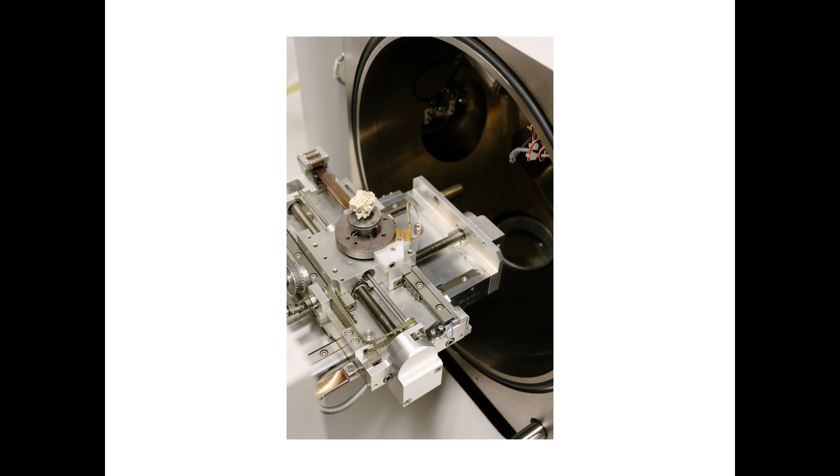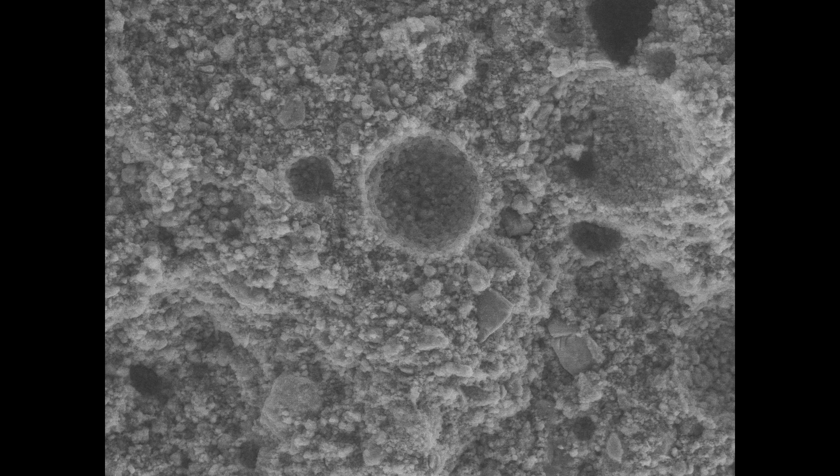And then with Sandrine Marceau, I was mentioning her, we start to dig and look a little more precisely into the matter, in a very rationalist and very scientific method. We described all the components of the mixture. This is the lime, so you can understand the different holes, different porosities, different shapes inside the lime.

That's the chenevotte. Here also you can describe different ways - this is where transparency, porosity, penetration of air and humidity become, and start to bring this idea of transparency a little different than just the view.

And we described, we drew, and we looked at everything, just like our heroes, such as Viollet-le-Duc, looking at things, redrawing, just like he was doing Le Mont Blanc. Very happy to follow this kind of new constructive rationalism, following this relation with matter, discovering the matter, describing the matter in order to build things and to understand the things that we built and the material that we manipulate.

And the greatness is the diversity of pores, of holes inside. So you have very small ones, you have very big ones. You have different shapes. And this is where it gets very sophisticated. So you have shapes in order

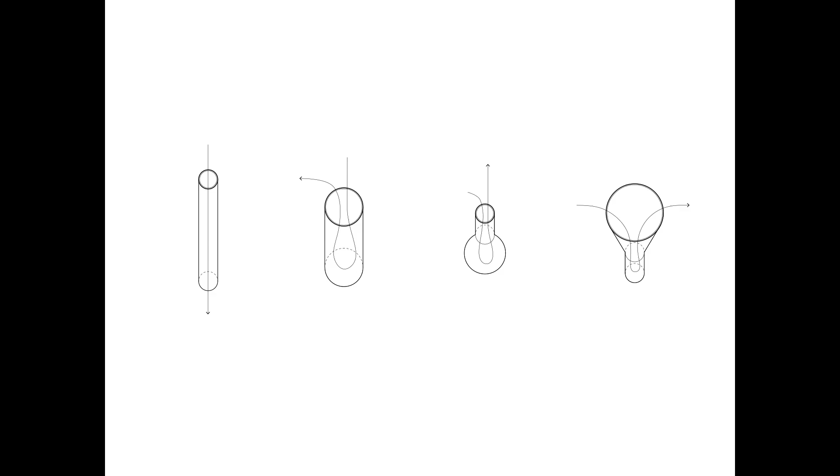to allow humidity to penetrate the envelope and to stop at the middle, more or less, of the envelope. But it also gets the air. So it insulates, because insulation is more or less captation of the air, but also it gives some dynamic phenomenon through the circulation of the water, humidity, inside the envelope.

So you have connected porosities for water, humidity. You have also insulated porosities for air as an insulation purpose. But you have also some weird, in-between, what we call blind, aveugle porosities. So you can circulate here, but then water stops here a little bit, and it gets transformed because of the heat. And at this level of sophistication of this pore, water starts to change of state. It was liquid, and it becomes vapor, and things like this are happening inside the envelope of hempcrete.

Then you start relooking at this building and this facade, and we understand that here, okay, that's marvelous, but other things are happening. This is the idea we're very interested in: this new transparency, these new relations that this kind of transparent insulation provides. It's very rich, it's sliding from one idea to the wall, which was something that blinds, that separates, that insulates at the first degree of its definition. But here, it connects the two climates, the one of the outside and the one of the inside.

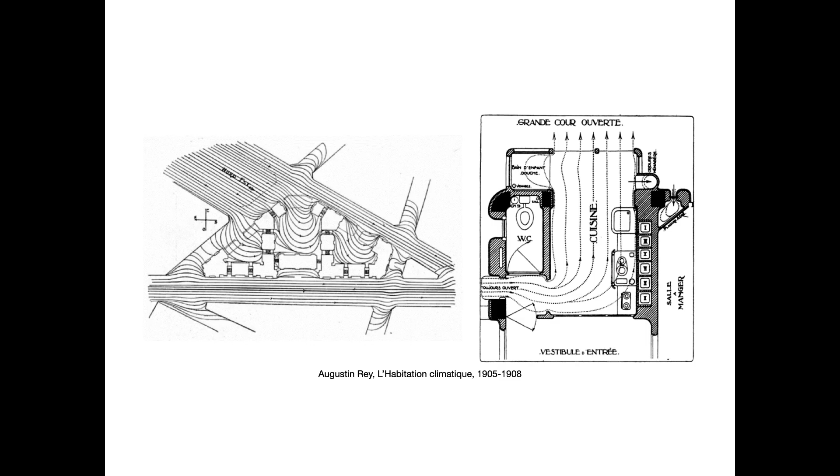Also the representation of the room, an extraordinary project, transformation at Rothschild Foundation from Augustin Rey, when he started the hygienist, following the hygienist movement, rationalist hygienist movement of the late 19th century, starting to be in the 20th century one of the most important ways of describing and dealing with the city.

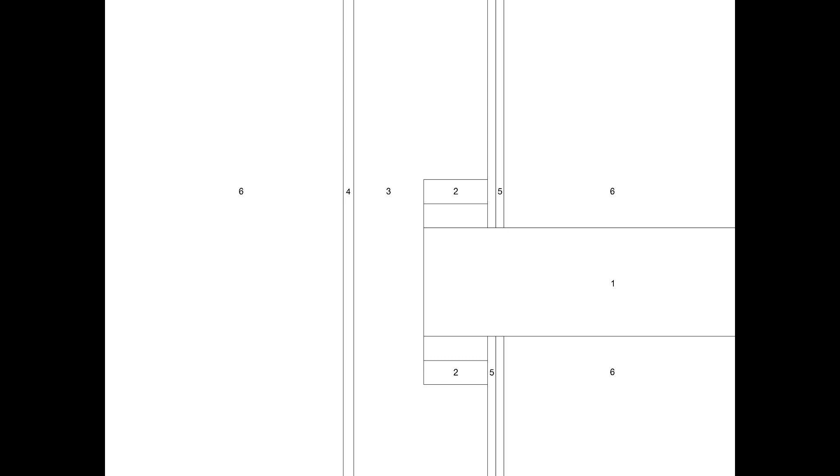Next, please. Then we start to describe different things rather than just the visible. You have the characteristics of the component of this assemblage, but also the phenomenon inherent inside the envelope. So here you talk about, for instance, density. In density, of course, concrete becomes black, air becomes white. And then you can have soft relation, and everything becomes coherent with the use of these horizontal lines.

In Rue Oberkampf, we're using this Auguste Choisy-like drawing where you can see the load-bearing walls, describing the fragment and construction of a building. Here we decided that we should be horizontal, and one line is having different types of thickness just to express the value of the things we're looking at. So here we look at density.

Next. Here we look at porosity. So of course, air becomes very black, while concrete is becoming a little whiter. But still everything is being connected because we know that with the use of stucco, the use of hemp, the use of fermacell, everything is able to be transpercé.